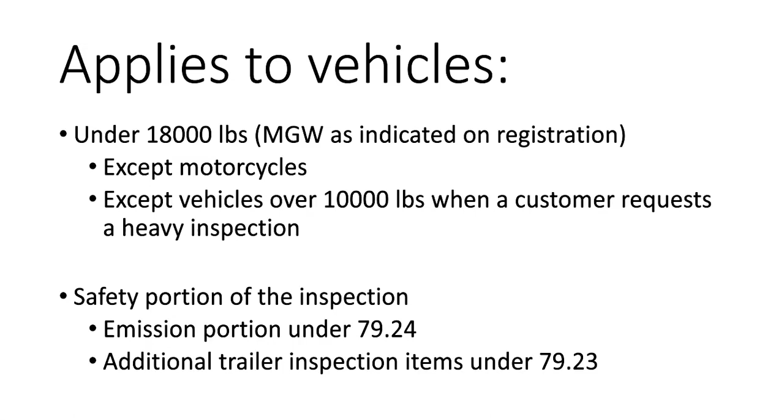So we are able to inspect up to 18,000 pounds with our Group 1 inspections. This section talks about the safety portion of the inspection. There is an emission portion, found in 79.24, which we'll get to in a few weeks. And then lastly, the additional inspections we have to do for trailers are found in 79.23.

All right, brakes. Let's talk about how we inspect brakes. We must perform a brake equalization test, which has us stepping on the brake pedal on a hard, level surface that's free from loose material, ensuring the vehicle stops in a straight line.

If it pulls real hard, it fails due to that, and we have to figure out why it's pulling significantly when you do the brake equalization test. This test has to be performed after a complete inspection, because during the inspection we're required to remove wheels.

On vehicles, we're required to remove at least one front wheel, and you're allowed to pull as many wheels as you wish to on a vehicle, but you are required to remove at least one front wheel. This brake equalization test sometimes helps you realize whether or not any issues were created when you pulled wheels, so make sure it's done after the complete inspection.

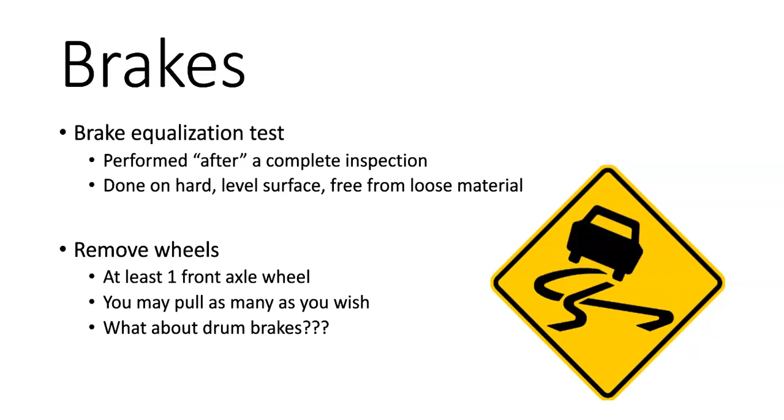But think about if you have a vehicle with rear drum brakes — in order to do some of the rear drum brake inspection, it's important that you pull rear wheels as well. New York State requires you to pull one front wheel, but you can pull as many as you'd like to do a thorough inspection. Again, the brake equalization test fails if the vehicle fails to make a straight stop without a significant wheel pull.

We fail these lines and hoses if they're cracked, leaking, not secured, or made of copper. We want to make sure we're using appropriate double-walled tubing when we repair a brake line, because otherwise it fails.

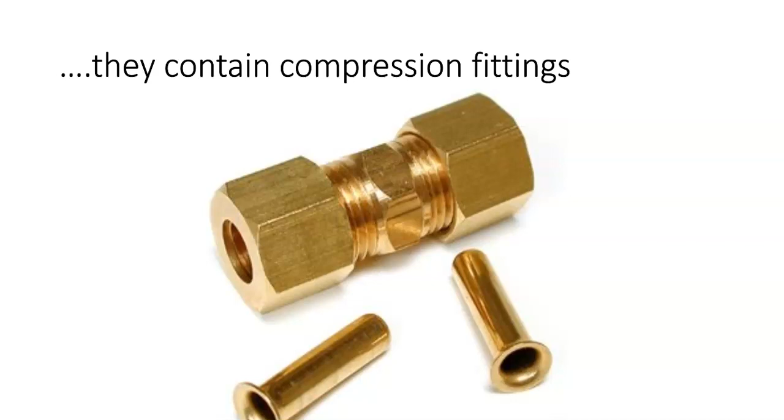We also inspect the master cylinder for leakage and the reservoir fluid level. If the brake master cylinder is leaking, it fails. If the fluid level is not filled to its design level, it also fails.

The next test we do is called the pedal reserve test. Basically, we step on the brake pedal with the engine running, because most of our cars, in fact all of them nowadays, have some sort of power brakes.

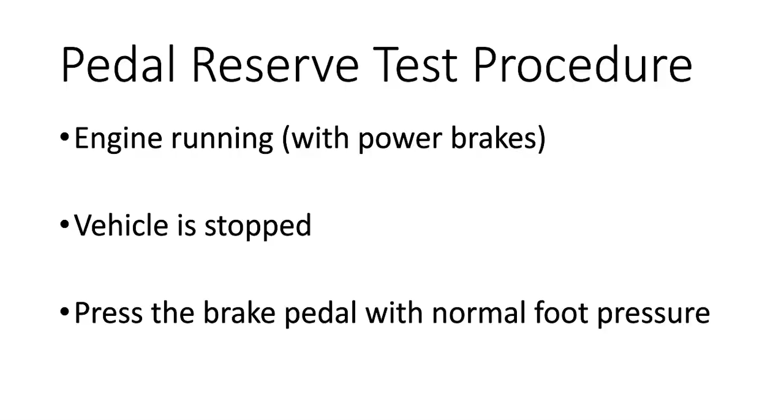With the vehicle stopped, we press the brake pedal with normal foot pressure, and we should have at least 1/3 of the brake travel remaining when the brake pedal stops moving down. So again, we want to look at the length of travel of the brake pedal, and as we press it, we want to make sure that we have at least 1/3 of the travel remaining when we're done.

At the same time we're pushing on the pedal, we want to test for brake fade. With the engine running and using normal foot pressure, we're testing to see that the brake pedal doesn't continually drop, doesn't slowly fade away from your foot. We fail the New York State inspection if the pedal does not hold for at least 60 seconds.

Typically, if it does fail, the reason is because of an external fluid leak, or possibly an internal fluid leak where fluid is bypassing the primary or secondary piston seals inside the master cylinder. So that's what this breakdown is. If you look at call-out section number 9 and number 3, those are your piston seals, as well as some of call-out 6 and 20. So if those rubber seals fail, the fluid bypasses the seal and your brake pedal will fade.

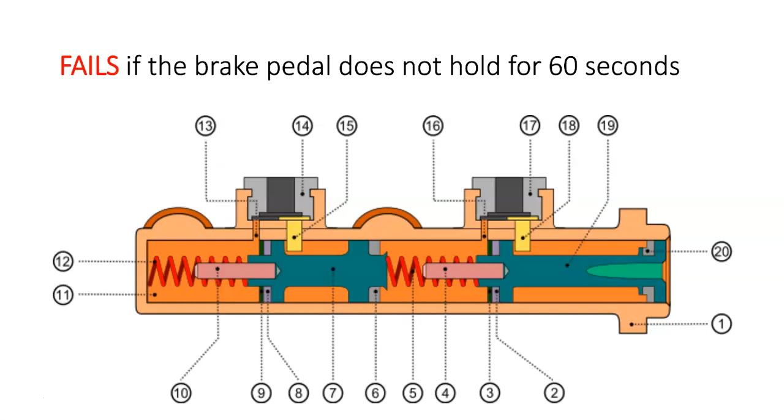The next test we have to do is to test the power brake function. This test is done in a unique way. The first thing we do is shut the engine off and pump the brake pedal until it gets hard. What we're doing is actually depleting the vacuum or pressure reserve.

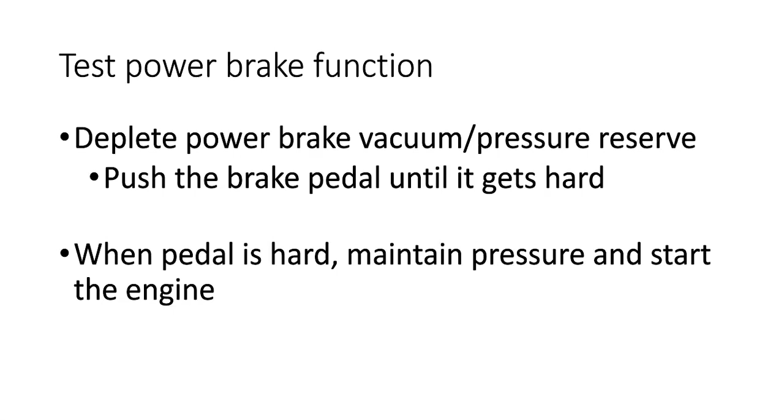Once we do that, we step on the brake pedal and we start the engine. If the power brake unit is working, the brake pedal will fall slightly, slowly dropping from our foot pressure. That tells us the power boost assist is helping us. If it does not fall slightly, that means the brake booster is not working.

Let's talk about drum brake linings. We have to remove drums or remove the little plugs on the back of the backing plate to look through the sight window to see how thick the drum brake linings are.

When we check drum brake linings, if it's a bonded lining where the actual friction material is glued to the shoe table, the actual metal part of the shoe, the vehicle fails if the thinnest point of that brake shoe is less than 1/16 of an inch. Again, for bonded linings, it fails if it's less than 1/16 of an inch.

If it has riveted linings, where the friction material is riveted, like the picture shown here, where that shoe is sitting flat, you measure the thickness of the shoe above the rivet head, and the vehicle fails if there's less than 1/32 of an inch over the rivet head. Typically, you're using a tread depth gauge or a depth mic to measure the shoe thickness.

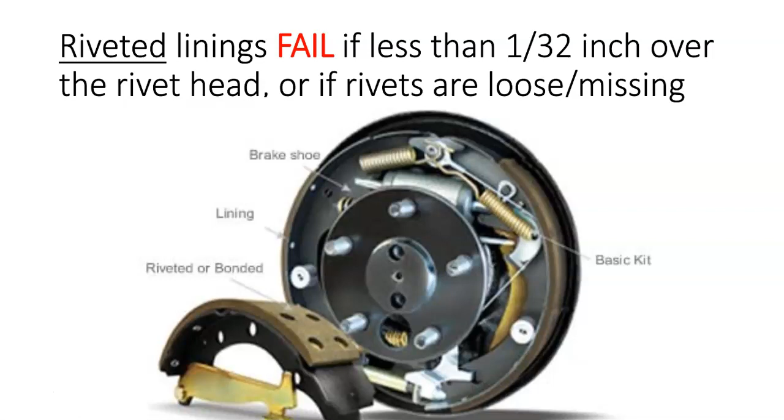We also check to make sure the friction material is not cracked, that part of the lining isn't missing, and that the lining is being held firmly against the shoe table. We're checking to make sure the lining is not contaminated. And if it's a brake pad we're talking about, we check that the audible or visual wear sensors are not touching the rotor. If they are, that fails New York State inspection.

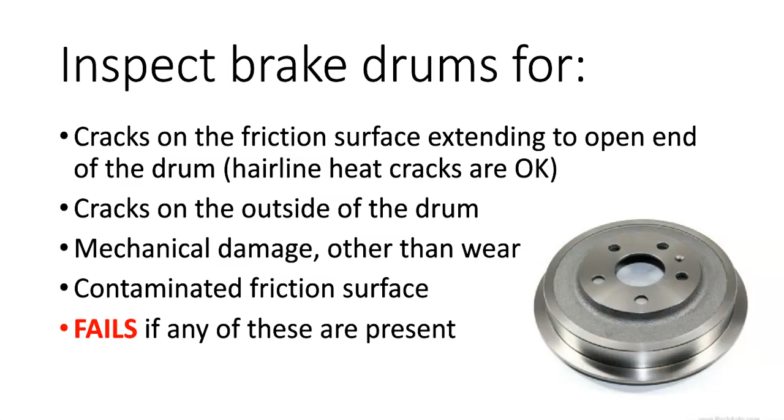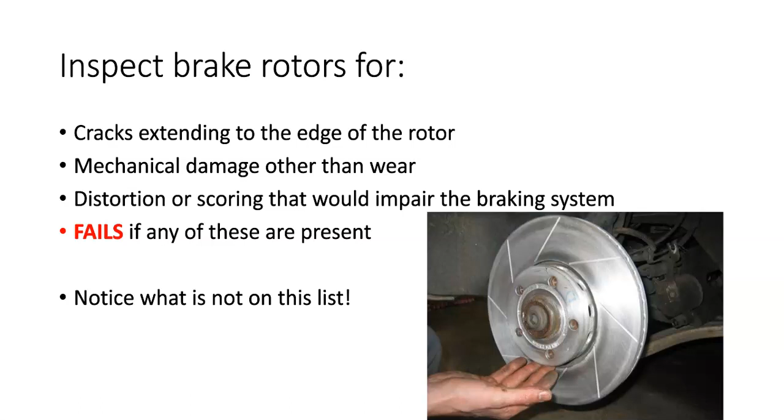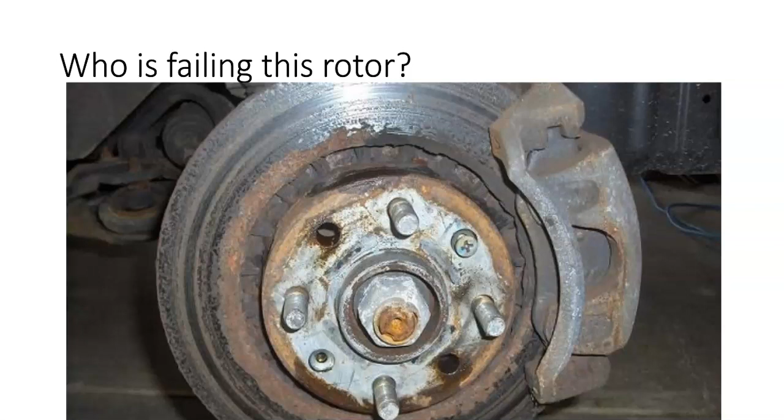So again, this rotor right here looks pretty rusty, but again, the phrase that we want to really focus on is: is there any distortion or scoring that this rotor has that would impair the braking system? Some inspectors would say yes, just by looking at it. Some inspectors would want to take it for a ride to verify.

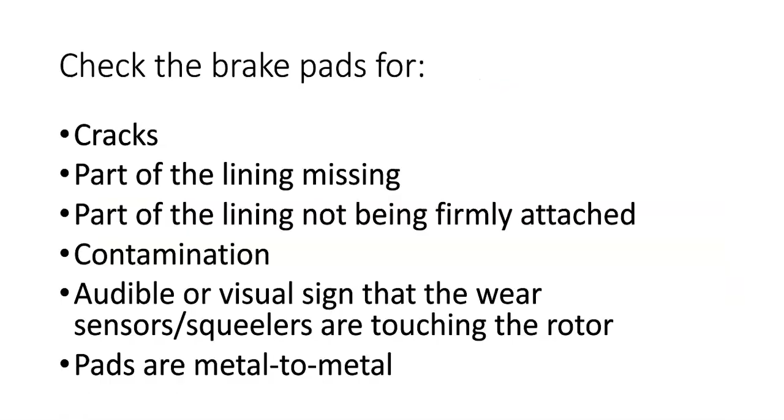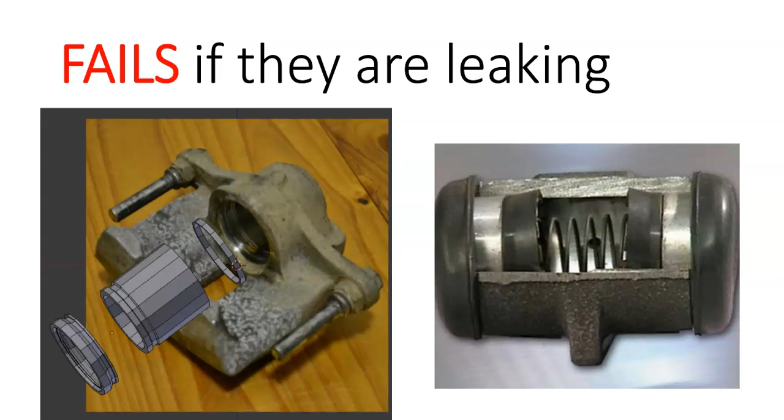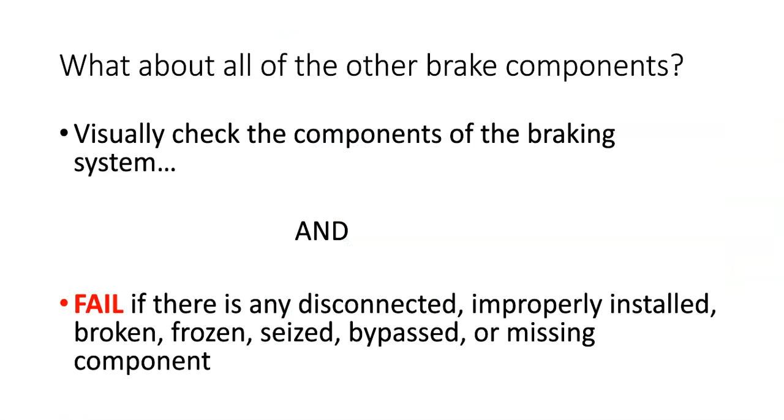So I'm going to scoot back to this picture of this caliper here on the left side of the screen. And those slider pins, if those slider pins are frozen, that would fail New York State inspection. And usually you have a good indication of this on the road test because the brakes won't feel like they're doing very well. So again, any component that's broken, missing, bypassed, frozen, or seized would fail New York State inspection.

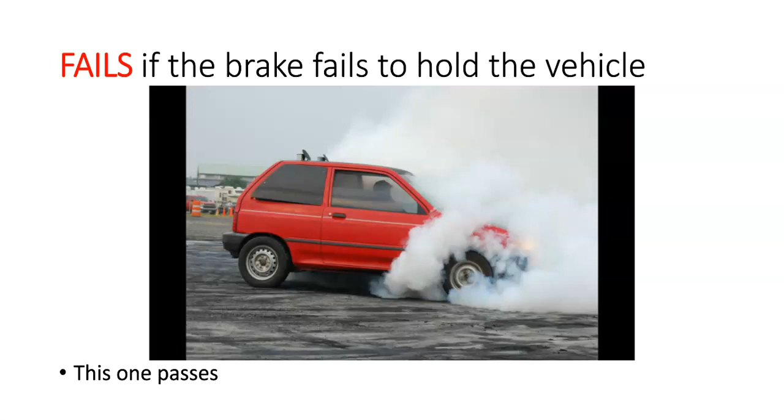So obviously this car looks like it passes. He's applied the rear parking brake and is able to burn his front tires. Obviously we're not doing that in our test, but you get the point.

You may run into a vehicle that has some form of electric parking brake that releases when the engine is running or driving, when the engine is running and it's placed into drive. There's no way to check that, and if that's the case, we don't have to worry about that function.

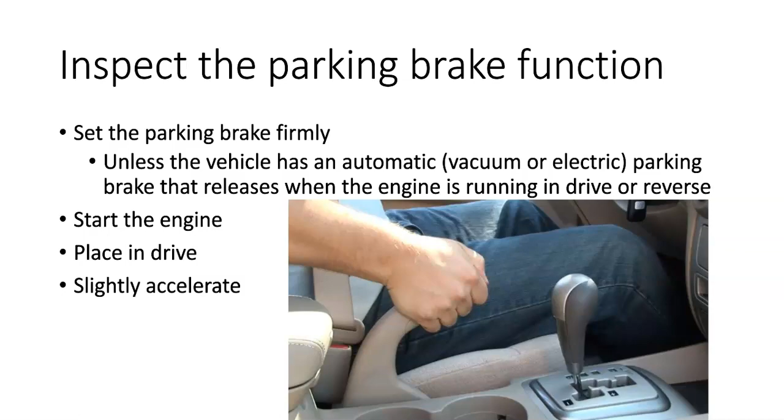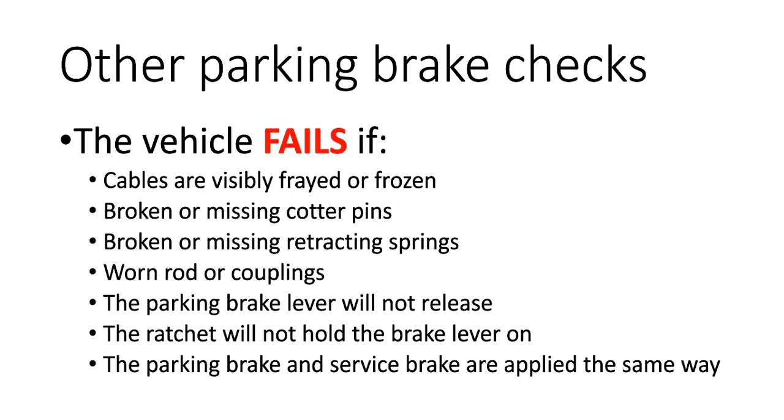Other parking brake checks: the vehicle fails if the parking brake cables are visibly frayed or frozen, if it's missing any pins, retracting springs, or if any rods or couplings are worn. If the parking brake lever itself, whether it's a hand brake or a foot brake, will not release once you've applied it, that fails. If the ratcheting mechanism will not hold the brake lever on when you release your foot or hand pressure, or if the parking brake and service brake are applied the same way—in other words, somebody's rigged up something where the parking brake is actually applied by the same service brake pedal—that would fail.

All right, let's move on to tires. We have to inspect all the mounted tires. We don't have to worry about the spare. What we do is check for the depth of the tread. So where we check it is at the major tread grooves, and we check the grooves that are showing the most wear. Vehicles that don't have some sort of parallel tread grooves, we want to check near the center of the tire, and I'll show a picture of this in just a second.

So we fail a vehicle if the tires are worn to less than 2/32nds at two major adjacent tread grooves.

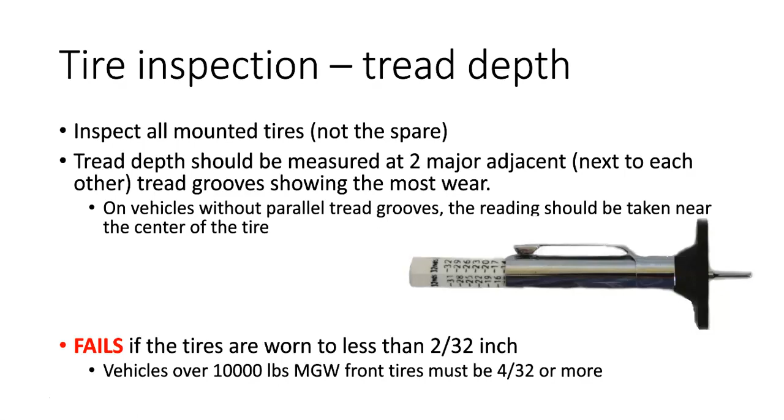Adjacent means next to each other. So we take two tread grooves, and if there's a spot where they are less than 2/32nds in two grooves next to each other, it fails. If you're working on a vehicle above 10,000 maximum gross weight, the front tires must be 4/32nds or more. So again, here's what we're looking at.

So this tire has 4 major tread grooves. You can see that most tires have tread wear bars that tell you at 2/32nds whether the tire is worn to that point. So you need to have a spot on the tire where 2 major adjacent tread grooves are at 2/32nds or less.

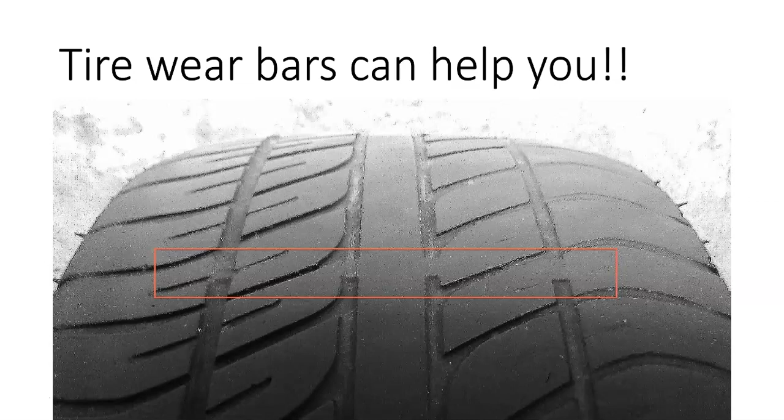For other tire checks, we need to make sure the tires don't have any breaks or cuts in them, that there's no bumps, bulges, or knots, that there's no ply or cording structure exposed, and that the tire itself is not of restricted use. In other words, it's not temporary use, not for farm use, racing use, or labeled as not for highway use.

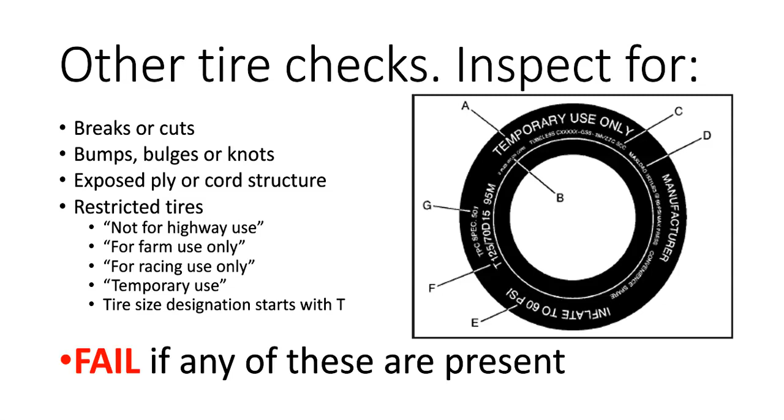You'll know if it's a temporary use vehicle, like a temporary spare. Some people have full-size spares these days, so you want to check to make sure you're not inspecting the spare tire. Any of these conditions on this screen fail New York State inspection.

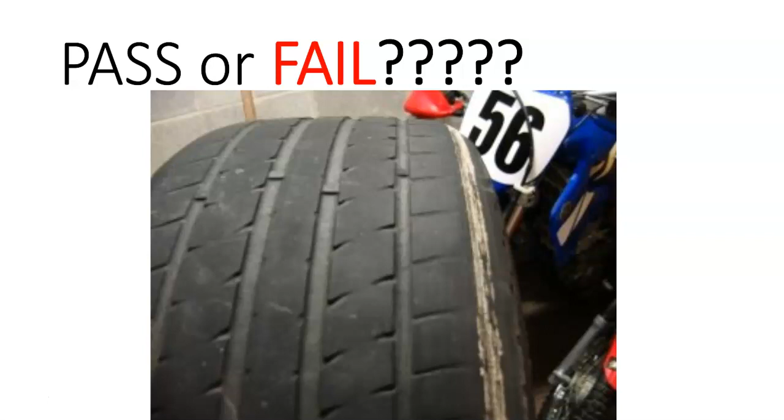So if we're looking at this tire real quick, would this tire pass or fail, and why? Well, if you're looking at the tread depth, you can see the wear bars. It looks like it's above 2/32nds, so it would pass based upon tread depth. But if you look at the right-hand shoulder of that tire, there's some cording exposed, so that would fail New York State inspection.

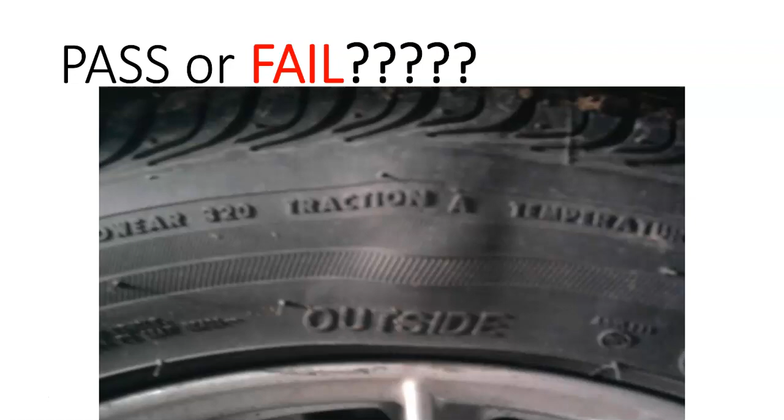What about this one? Pass or fail? If you said this would fail because it has a bulge on the sidewall or a bump on the sidewall, you'd be correct. This does fail New York State inspection.

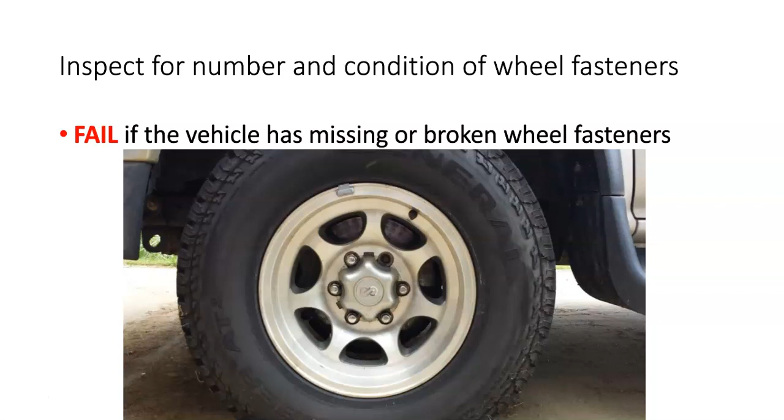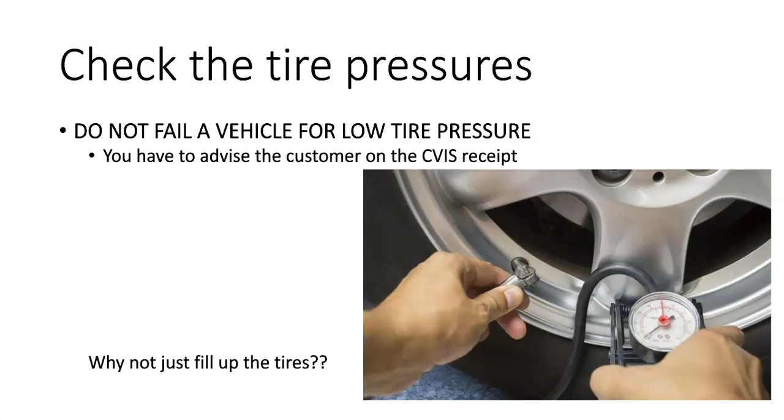All right, let's move on to Section D, which is your steering, suspension, front end, and chassis frame inspectable items.

So the first thing we do is a steering wheel free play test. The way we do this test is we start the engine. The engine must be running. We need to check that the power steering belt tension is good and that the power steering fluid level is good. With the wheels straight ahead, we move the steering wheel left and right until we see front wheel movement, and we measure about how much free play we have in the steering wheel as we're moving it left and right.

So for a vehicle that has power steering, you're allowed 2 inches of free play. For manual steering vehicles, which I don't know too many of anymore, there will be 3 inches of free play allowed.

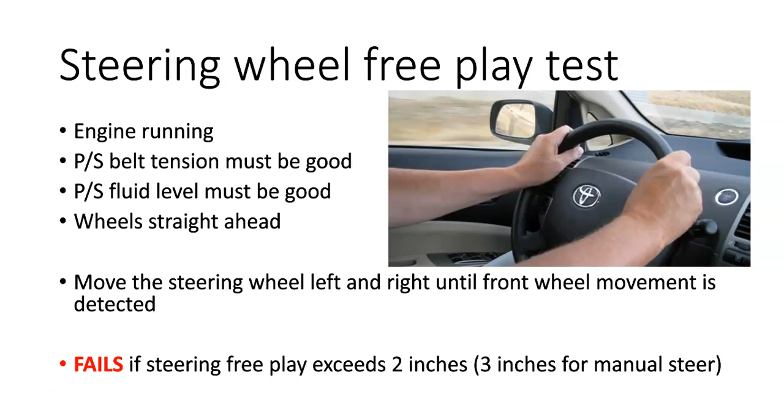We are also inspecting all of the steering linkage components, and we turn the wheel all the way to the left, all the way to the right, from stop to stop with the engine running, and we fail the vehicle if there's any tightness, binding, or interference in the steering travel, full left to full right.

We then raise the vehicle off the ground, and we check the steering linkage and front end components for any wear or looseness. We fail if there's any wear or looseness found in the parts listed in section 79.21, section D, number 2. Now, I didn't list them, but it's found on page 41 of your textbook. I can read them very quick.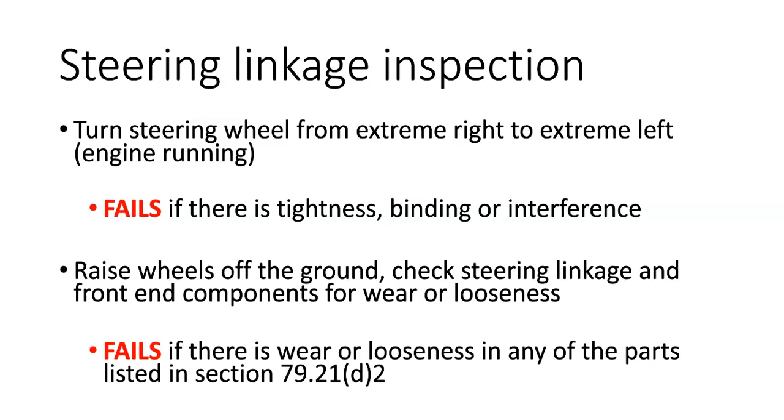We want to check the adjustable column lock or latch to make sure that the steering column is held securely. We also want to check the steering shock dampener to make sure it's not broken, missing, or leaking. It's quite a list, so if you're unsure of what any of those parts are, go back to your steering and suspension textbook to determine what those parts are.

We then look at springs. There are a number of different types of springs that we suspend vehicles with, but we fail the vehicle if there's any front or rear spring—coil springs, leaf springs, air springs, torsion bars, shackles—that is sagging, broken, worn, or loose. Sometimes we want to notice the ride height of the vehicle; if one corner is hanging down, that helps us know whether a spring is broken or worn.

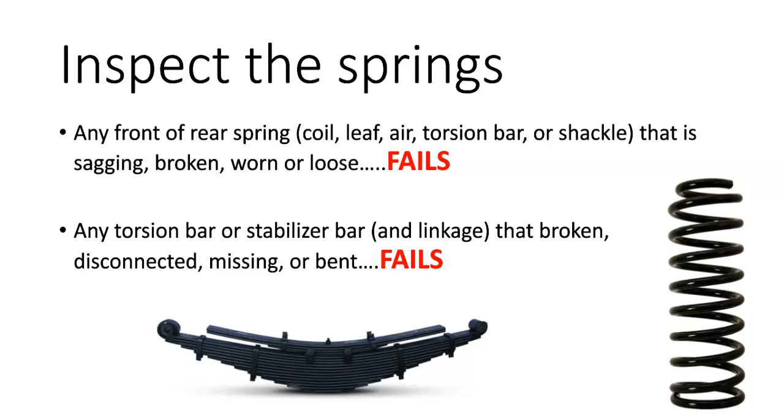For any torsion bar or stabilizer bar and linkage that's broken, disconnected, missing, or bent, that would fail. Most cars have stabilizer bars, so we've got to make sure nothing's broken, missing, bent, or disconnected.

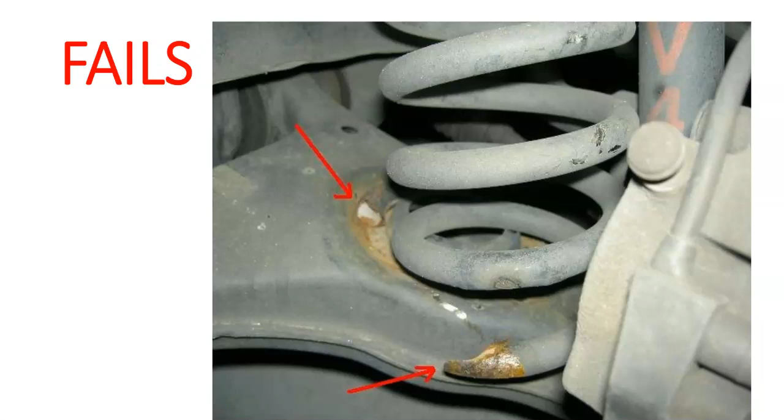Here's a picture of a coil spring. You see where the arrows are—you notice that the coil spring's broken. That would fail New York State inspection.

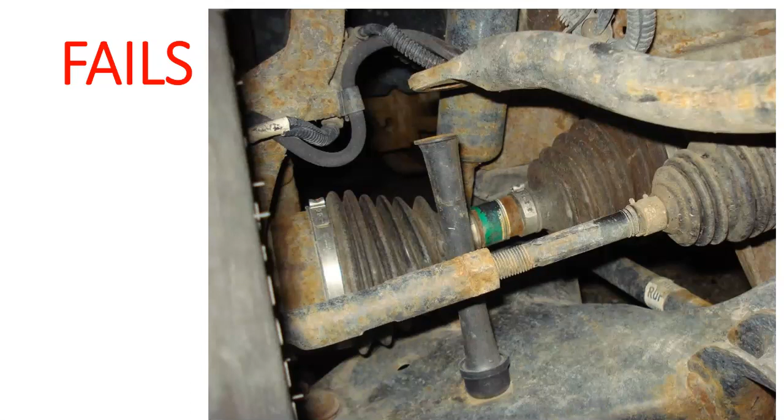This is an example of a sway bar. The curved piece coming from the right upper corner of your screen should be connected by a stabilizer link pin, and that pin is broken. That would fail—this is also a fail.

Let's talk about the chassis, frame, and primary unibody members. We're looking the vehicle over for its frame. For cars with unitized bodies, we're looking for the primary unibody members, kind of like the boxy type of frame-looking parts. We fail the vehicle when we come upon any of the following things.

If the front wheels are visually out of alignment—in other words, with your eyeballs you can tell those front wheels are out of alignment—that would fail. If any axle or front end assembly is bent or twisted, that would fail. A chassis, frame, or primary unibody member that's rusted at any suspension attachment point would fail.

Now, in Western New York we have surface rust on things—that's not what we're talking about. We're talking about rust to the point where the material is thin. So there's a little bit of wiggle room here for you to make a determination as an inspector on what would fail and what would not.

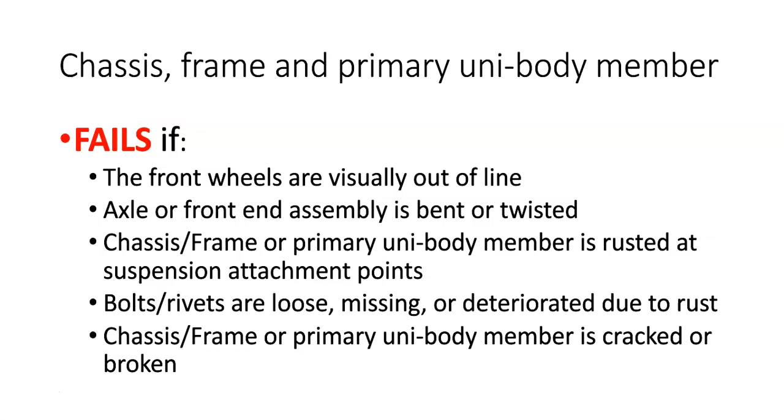Any bolts or rivets that are loose, missing, or deteriorated due to rust would fail. And if there's any part of the chassis, frame, or primary unibody member that's cracked or broken, that would fail New York State inspection as well.

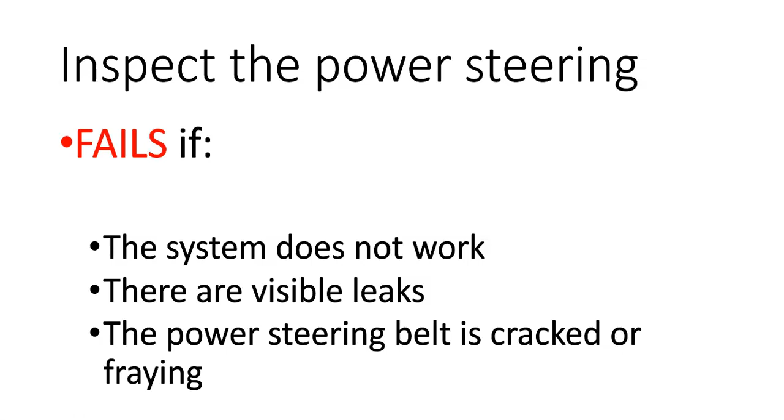We have to check the power steering. We check it by visually inspecting for any leaks, and we want to start the car to see if the power steering feels like it's working. We also have to check the power steering belt to ensure it's not cracked or fraying.

You can read a little bit more about that on page 41 of your book.

Shock absorbers—we have to check the shock absorbers of the vehicle and their mounting hardware. We have to fail vehicles that have shocks that are missing or broken, or where the mounting hardware or fasteners, the bolts, are missing or broken. However, a leaking shock absorber does not fail.

Again, these are your suspension shock absorbers—those do not fail for leaking. But going back to the steering dampener, the steering shock absorber if you will, if that's leaking, that does fail. So again, there's a difference between the steering shock damper, which looks like a shock absorber, versus the actual shock absorbers of the vehicle.